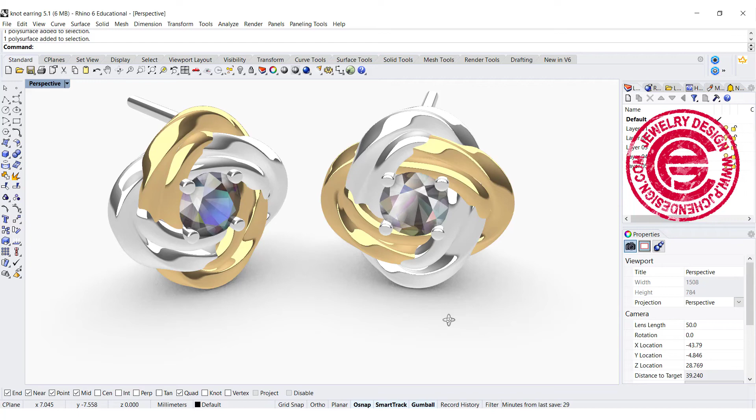In this video, we are going to look into how to do the twisting and also interlock earring model. Are you ready? Let's get started.

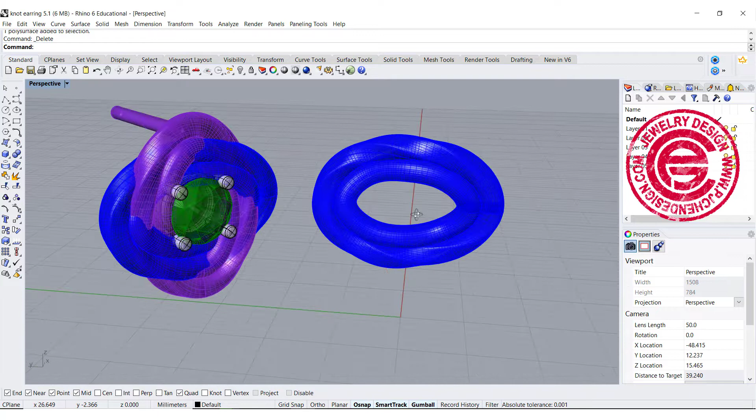Before we start modeling, let's take a look at the structure. I'm going to delete some of them so you can see the form better. We have the pipe structure inside and we also have a twist structure outside. With this structure, you can see it is a little bit deformed in a way, so when you have two of them together, it shows more like interlocking. As long as we can figure out that one part, we should be able to do the rest.

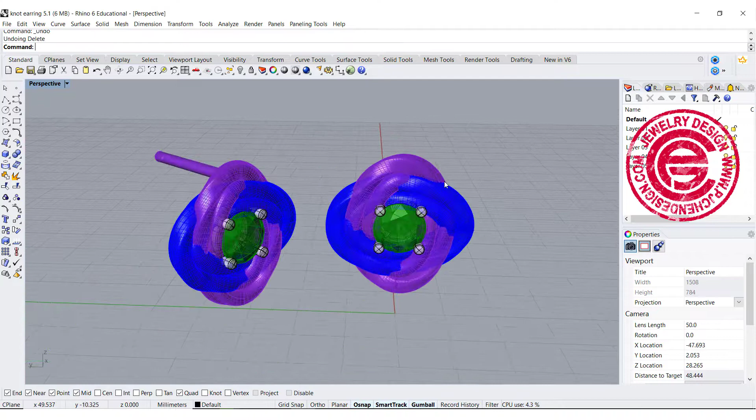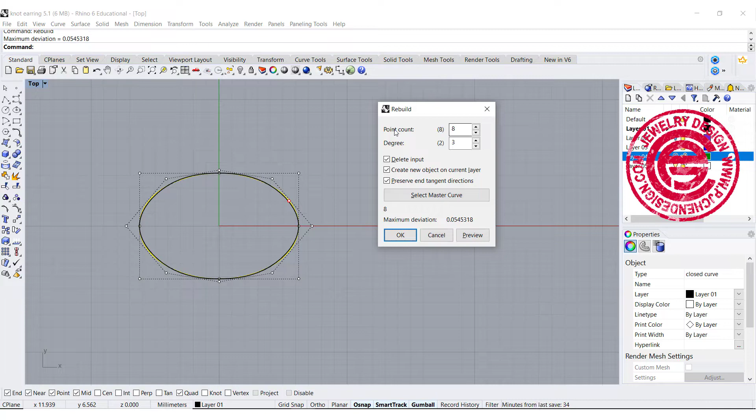We are going to start from scratch. Let's draw an ellipse from the top view. It can be any size that you want. I want a size around like this. This is a degree 2 curve. We are going to rebuild it into degree 3 so we can have 2 directions. We can stay with the same count for the points, but change the degree to 3.

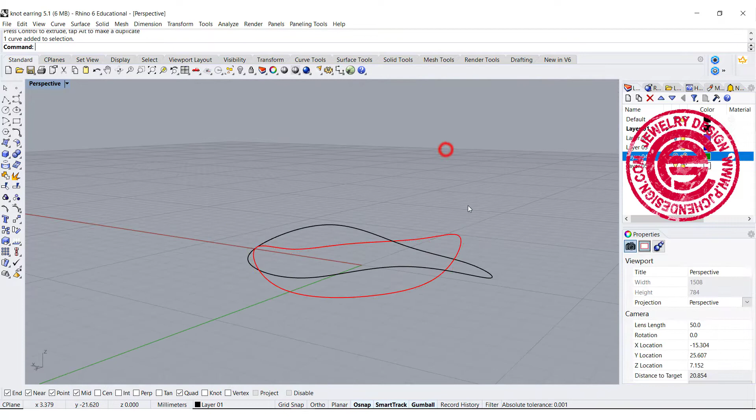Once we have changed that, I'm going to pick up this point and this point. Let's do a test - we want this point going up like this. If we rotate this 90 degrees and make a copy, let me turn this into red color so it's easier for you to see. You can see they kind of go up and down and not touching each other there, so that does make it easier to see.

Let's simply just pipe them, so you're going to get some sort of structure like this. You can adjust it later on if you want to, but this is pretty much what we wanted to have - kind of locking each other.

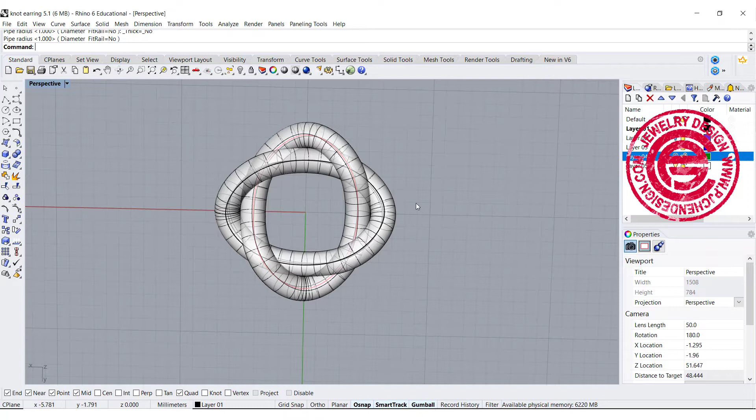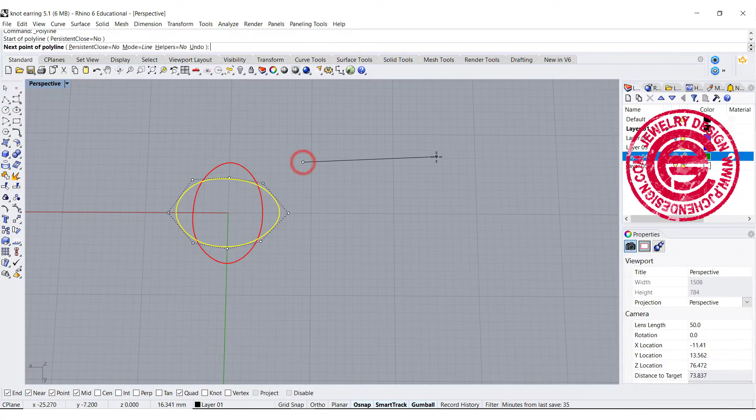Once we have that, we are going to do our design on the side. Let's figure out how long this is by using the command length. It shows 33.396 millimeters. I'm just going to make a copy, and let's draw a straight line here with exactly the same length, holding shift. Then that will represent this curve when it is straightened flat.

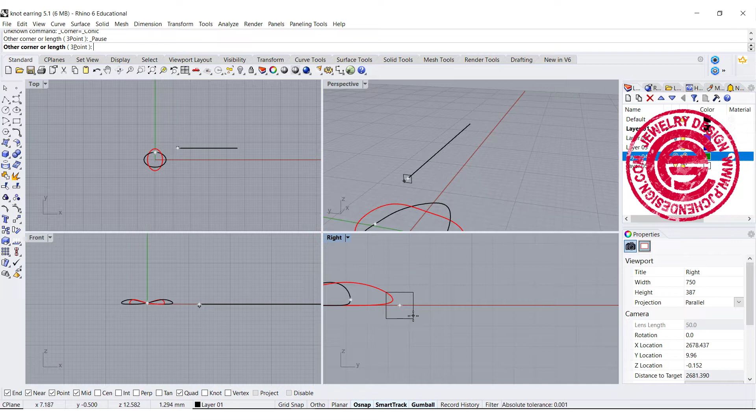We want to do our design over here. I'm going to use the conic corners and make sure it's snapping with the center, snapping over here, and coming into the right view to decide how big you want this. I do not want it to be dramatically giant, so somewhere around here will be fine.

Once I have that, I'm going to use sweep one, choose the rail and cross section, and I will get this. We're going to use the twist command under the transform menu, then you got the twist over here.

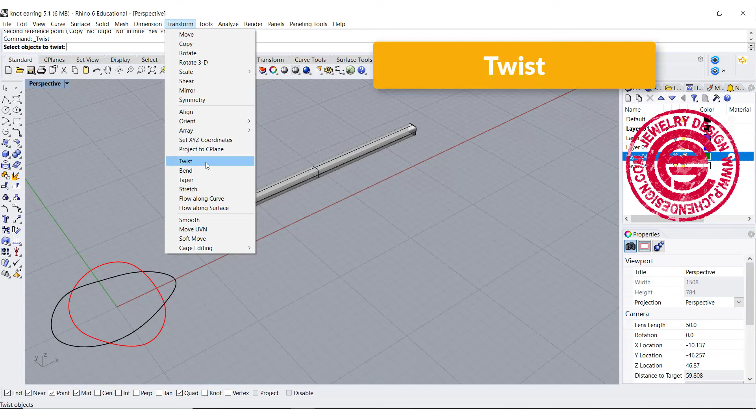We're going to select this one, starting from the endpoint over here to the endpoint on the other side. Make sure infinite is set to yes, and we want to go 1, 2, 3, depending on how many times you would like to twist. Then we'll get this shape over here.

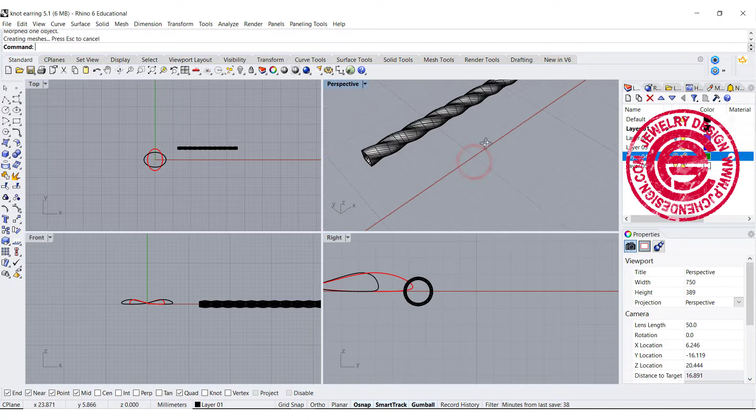The second shape that I want to do is similar size, so let's draw a circle roughly about this size. Let me move this to the side so it's not bothering us. We are going to use the surface sweep one rail.

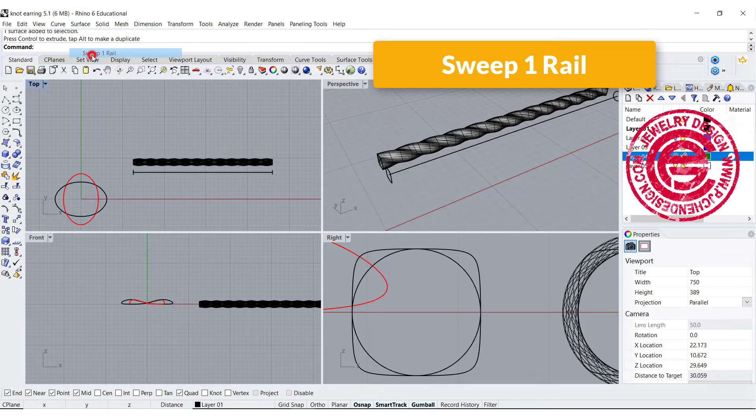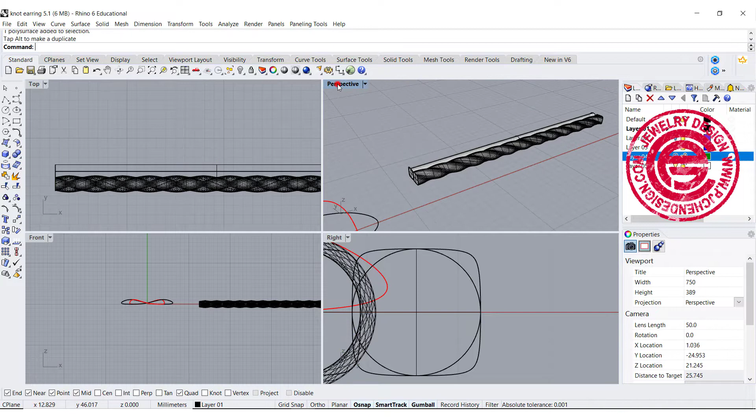Pick the rail and pick your cross section, then you will get this pipe looking thing. Let's go ahead and cap both of them to make them solid, and we want to move one back next to each other. Okay, so let's do a test to see how it goes.

We're going to come in here to use the command flow along curve. We're going to flow both of the objects. The base curve is here, and remember to record the history, and we want to click on the target curve.

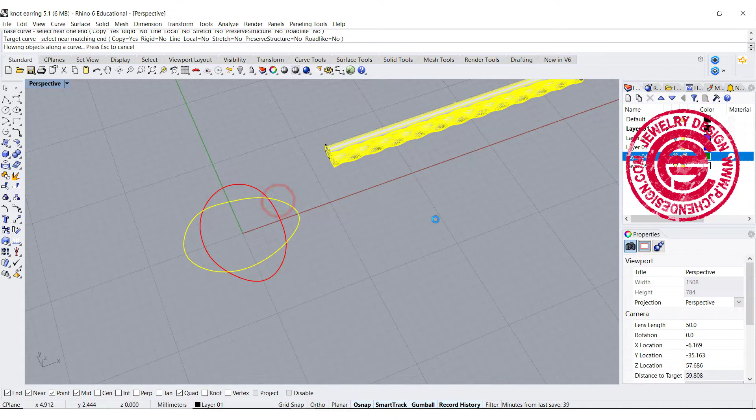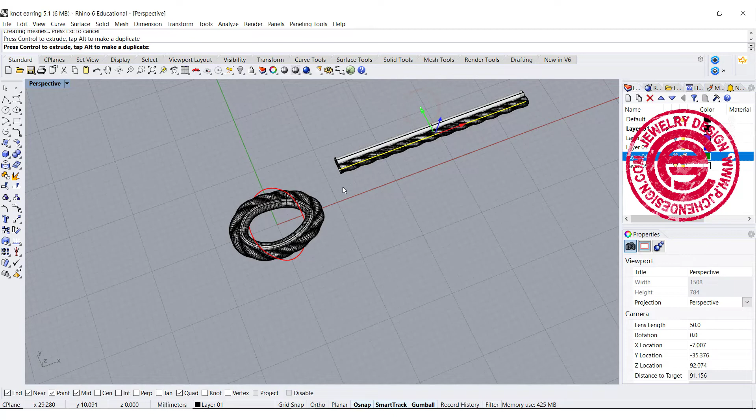If you feel like this is increasing the size too much, since we recorded the history, we can move this base curve more close to the center, and they will come in a little bit more. If you want more, make sure you're moving in a little bit. One thing you want to pay attention to is you do not want this to be deformed too much.

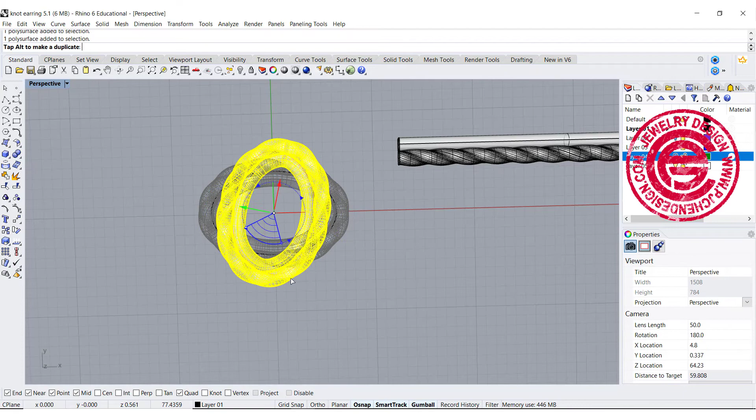So I like to keep it somewhere in the center over there because I'm going to set the stone in the middle. Double check if you like the result. If you do, let's go ahead and rotate it 90 degrees, holding shift and hitting the Alt key, so you will get the duplication over there. So this will be our twisting interlock earring structure.